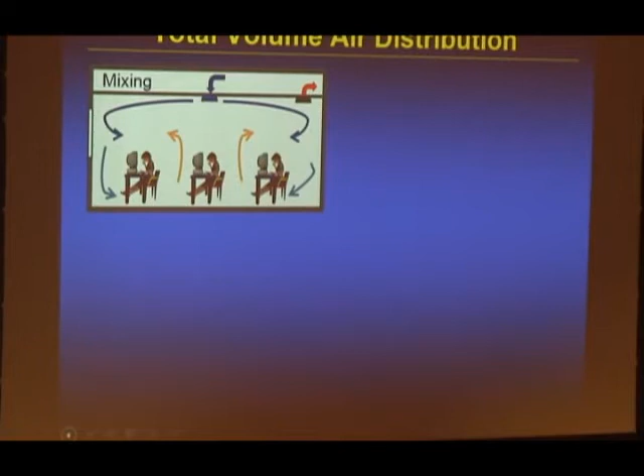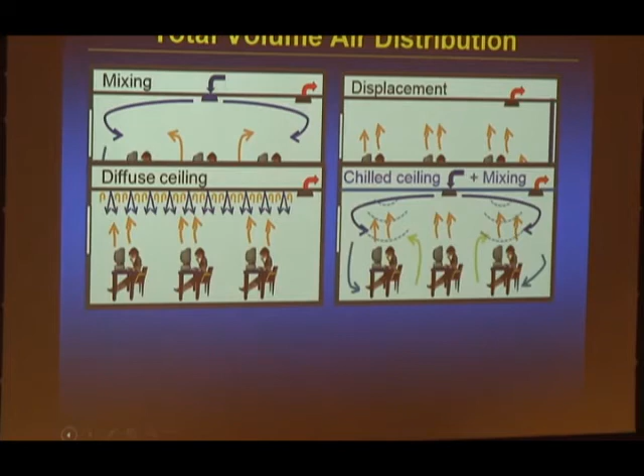How do we do it today in rooms? I believe all of you know about mixing ventilation, and displacement ventilation. We have diffuse ceiling ventilation, chilled ceiling combined with mixing ventilation, chilled beams, sometimes combined with radiant panels or without, underfloor ventilation, and several other ways to supply air into spaces.

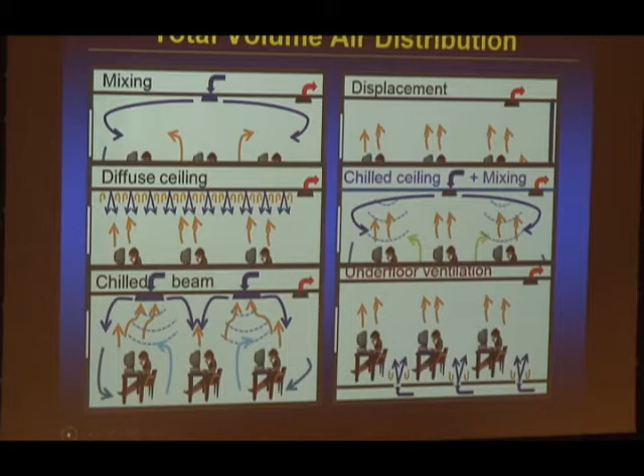Almost all of this, except to some extent displacement ventilation - though in practice very often it performs as mixing ventilation - are known as ventilation by dilution. It is more appropriate, I believe, to say air distribution by mixing. And this is quite an inefficient way to do it, in my opinion. I will try in the next slides to justify why it is so.

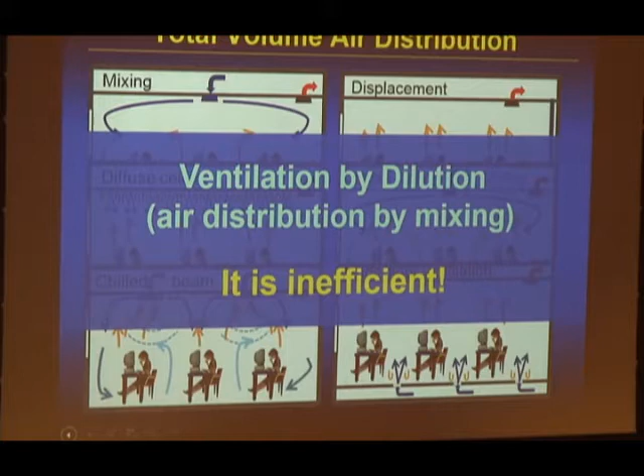Let us take the example of a room. It has a chilled ceiling combined with mixing ventilation that distributes the air over the ceiling and then over the walls, floor, and then it goes to the occupied zone and finally reaches the occupant.

Today it is well documented that building materials such as wall painting, flooring coverings, carpets or linoleum, or other materials, furniture, formaldehyde they emit, office equipment, occupants themselves - bioeffluents and exhaled air - all those emit pollution.

The purpose of ventilation, as I already mentioned, will be to dilute this pollution and to provide occupants with better inhaled air quality.

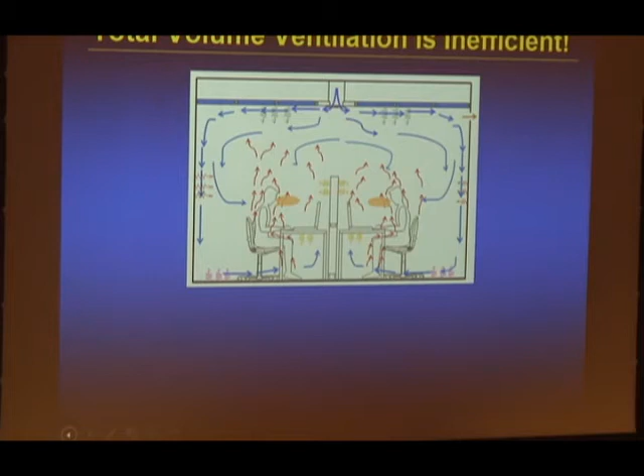What we do today is that we try to ventilate the entire space. And of course it is inefficient because at least part of this space, 1/3 of it, we never use. But in this 1/3, close to the ceiling, in fact, we provide the cleanest air.

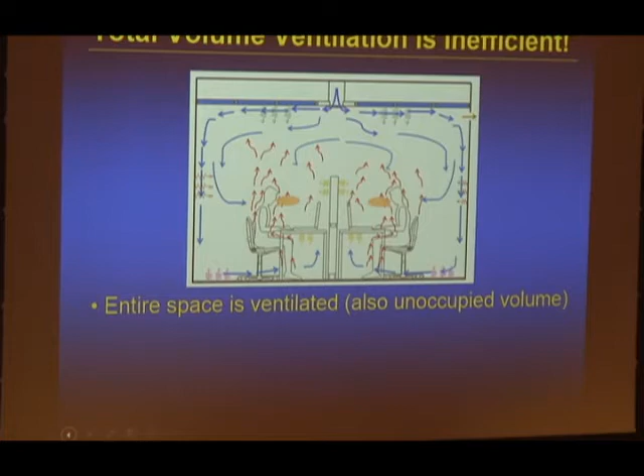We supply a lot of air into the space in order to improve air quality and reduce pollution. So we use a lot of energy, big air handling units, duct systems, and of course it's costly. What we do is quite inefficient.

All this pollution that I already mentioned, generated from the walls and the floor, we take it, transport it, and bring it into the occupied zone, close to the occupant. And then to improve the inhaled air quality, we supply more air and of course use more energy.

Even if we do so, it happens that people do not breathe clean air, simply because air supplied far away from them, from diffusers at the ceiling, by the time it reaches the breathing zone, is already mixed with the polluted room air. It is also warmed.

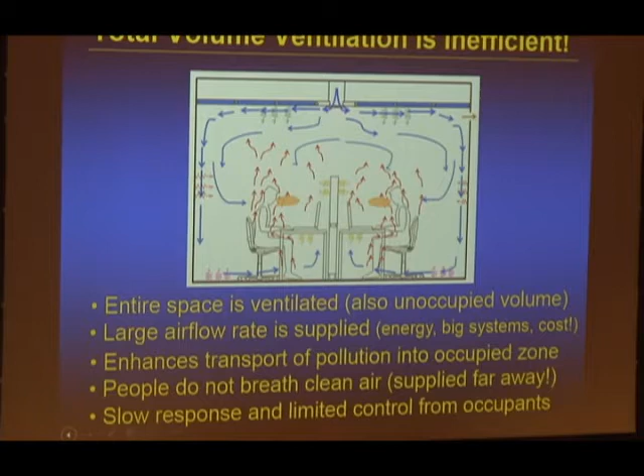Also, these systems, when we try to ventilate the entire space, they tend to be slow. They have limited control also - sometimes, in fact, no control from the side of occupants.

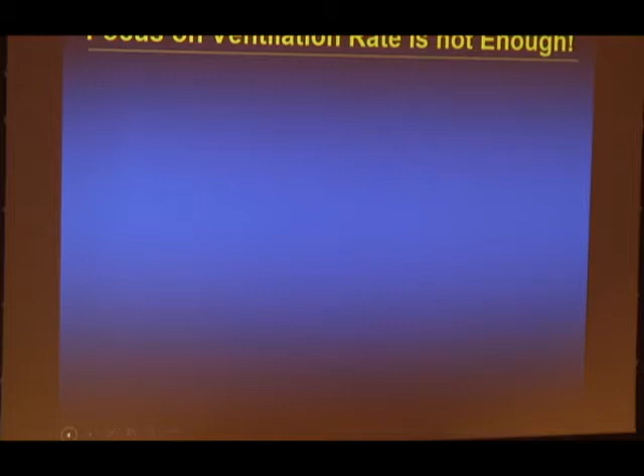What today, in fact, we focus mainly on - I listen to many presentations, and if you open the standards, we read very much about ventilation rate. Nothing, or very little, we read about airflow distribution, and it is very important.

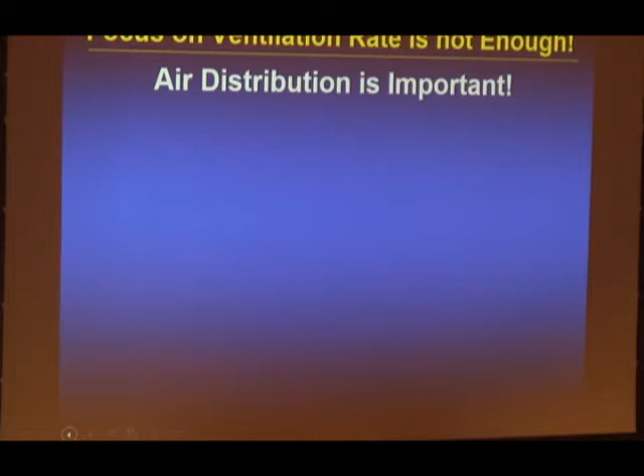It has in fact been admitted and realized that this is so important many years ago. I have here a figure from a book which was published in 1899 - so not last century, but the century before that. And it shows exactly why air distribution is important.

This is a classroom, and we have a teacher who generates or emits bioeffluents, polluted air, and because of the warm body's thermal plume, all this pollution goes to the ceiling. In the same way, candles - at that time there was no electricity, they used candles - generate pollution but also heat and buoyancy flows, and these flows move the pollution to the ceiling.

Then what we do is supply the clean air just where the pollution is, and transport it to bring it to the occupied zone, to the occupants. So, a very, very inefficient way. They advise us in this book not to do this, and give many other examples. Nevertheless, what we do today, in most cases, is the opposite of what they advised us.

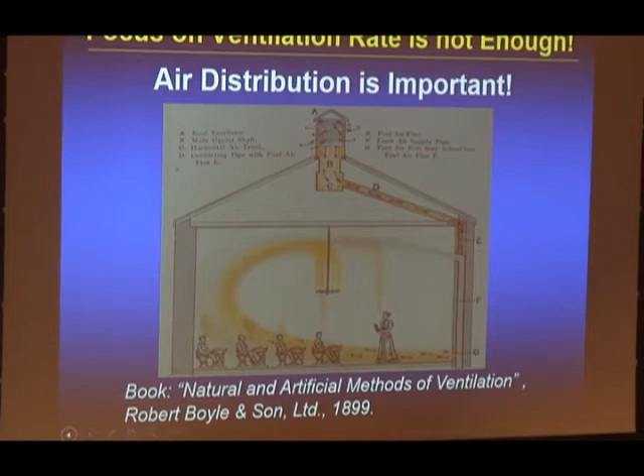Let us see the standards. Typically today, standards recommend certain flow rates for comfort, maybe 4, maybe 7, maybe even 10 liters per second per person.

The figure on the right shows percent of dissatisfied occupants with perceived air quality as a function of the ventilation rate, in liters per second per person. Results from Asia, Europe, and America show the same trend.

When we compare them: if we supply 10 liters per second, we may get about 15% dissatisfied occupants. But if we want fewer dissatisfied occupants, maybe only 5%, we have to improve the supply ventilation rate, maybe to 20 or 30 liters per second per person. That's a huge amount of air to supply into the space.

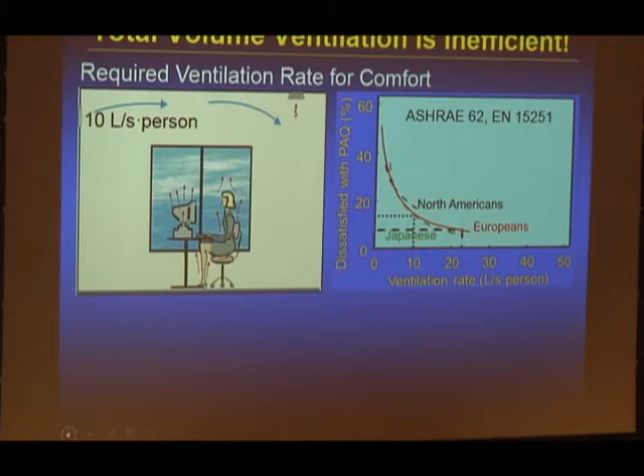A lot of energy we have to use. How about health? About 3 years ago, Sundell and co-authors published a review paper in the Indoor Air Journal on ventilation rates.

Their conclusion, based on a comprehensive review of available literature, was that we should supply a minimum of 25 liters per second per person in order to minimize health risks, sick building syndrome-based symptoms in spaces.

This is quite a lot compared to what we need on average for breathing, what we inhale, which is about 0.3 liters per second. Close to 100 times more we supply, and as I said already at the beginning, the primary aim of ventilation is to provide clean air for breathing.

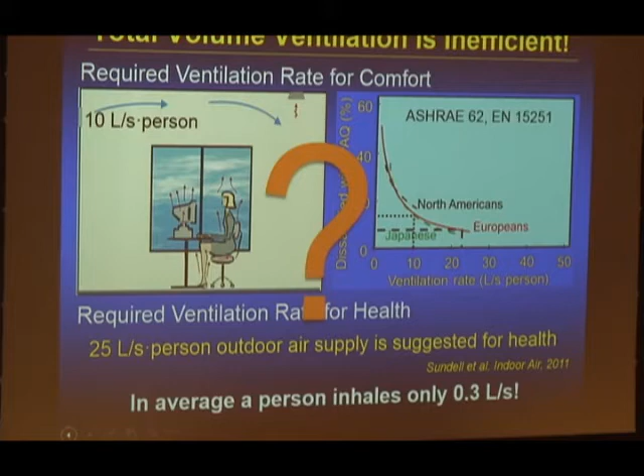So this is a question we have to try to solve. Often, ventilation air is also conditioned in order to maintain the right proper temperature and humidity in spaces.

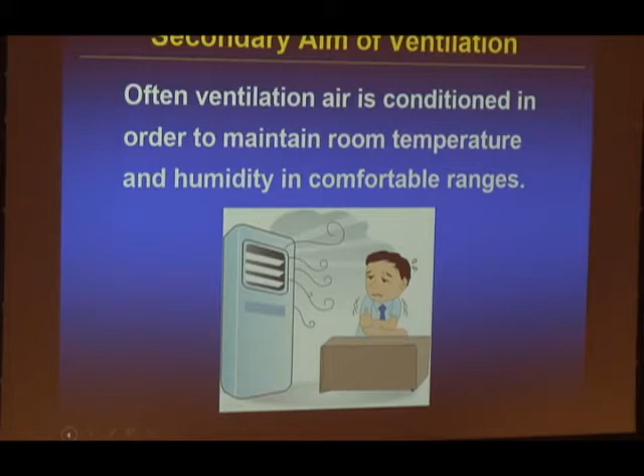Today it is well recognized that several characteristics of the airflow are important for thermal comfort of people, such as velocity, turbulence intensity, and frequency of velocity fluctuations. Airflow direction is important, air temperature is important, and so on. So it is very important that we are able to control this flow and its characteristics.

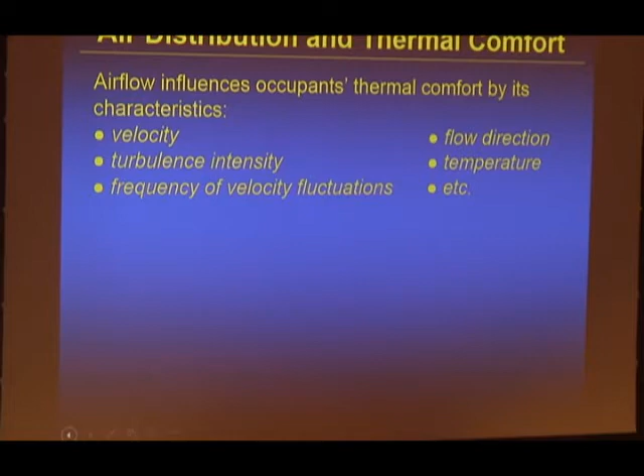Unfortunately, we are not able to do this, because with total volume air distribution, by the time the supplied jet or flow reaches the occupied zone, it is in the fully developed region of the flow. It is recirculation air, and that is very difficult to control.

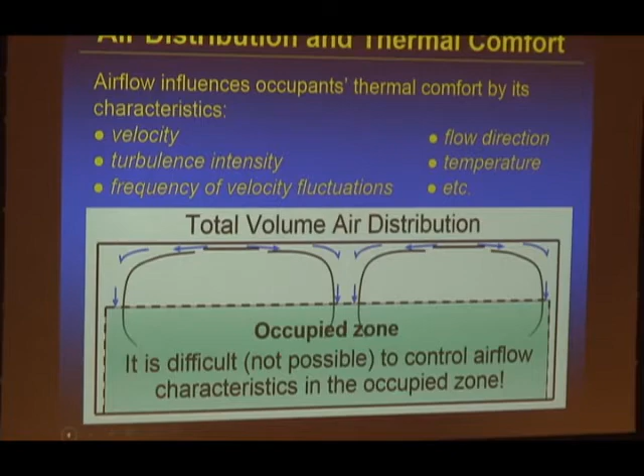Complex interaction of airflow in rooms exists. It is not the ventilation flow that always decides or defines the airflow pattern. There are thermal flows generated by heated objects, and the strength and location of these heated objects differ. This may change over time, and this may affect the air distribution in the space.

As a result, occupants will be exposed to a changeable environment. It is very difficult, in fact, to control this airflow interaction. Here the figure shows two examples.

We have an air distribution system on the left, well balanced to provide clean and cool air to the two occupants, and they will be happy. But as soon as solar radiation starts to hit the window, it becomes warmer and generates a thermal buoyancy flow, which together with the thermal flow from the computer and occupant becomes strong enough to discharge the ventilation flow to the opposite side of the room.

So the person near the wall, far from the window, gets a lot of air, maybe in discomfort due to draft, while the person near the window is also in discomfort because of warm discomfort. So this is very difficult, in fact, to control.

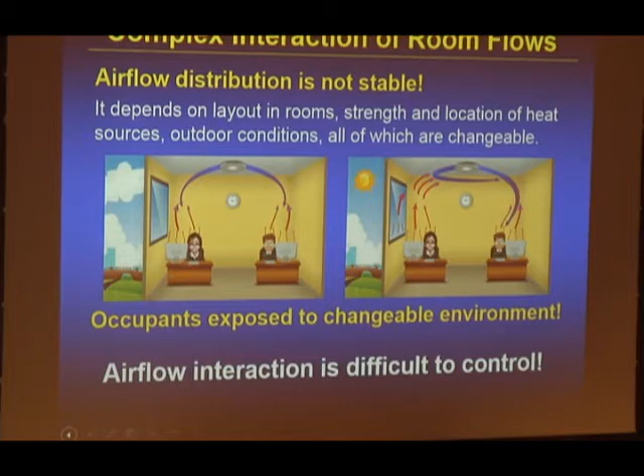Now, I believe most of us in this community believe that the goal is to have a healthy, comfortable, and productive environment in spaces, and not just one of these elements or components, but all of them should be in place.

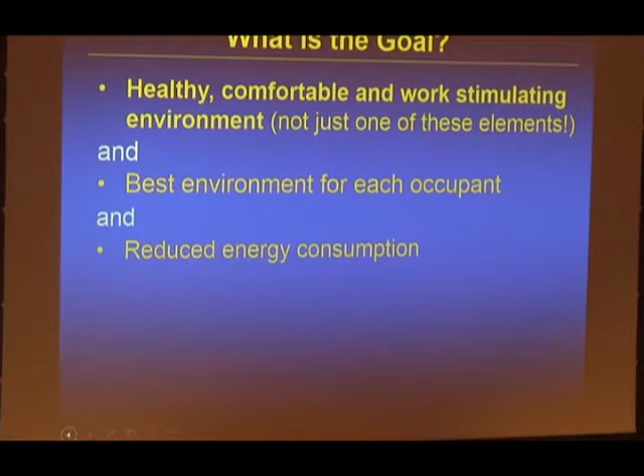It is also very important at the same time to have excellent conditions for each occupant, not for the average occupant, which does not exist. For each of these occupants, we may provide the best environment. And also, not instead, but at the same time, we have to reduce energy consumption. Some practitioners may also want flexibility in the use of space.

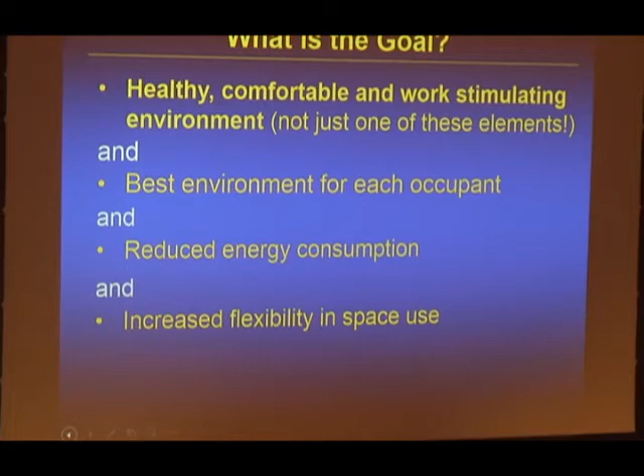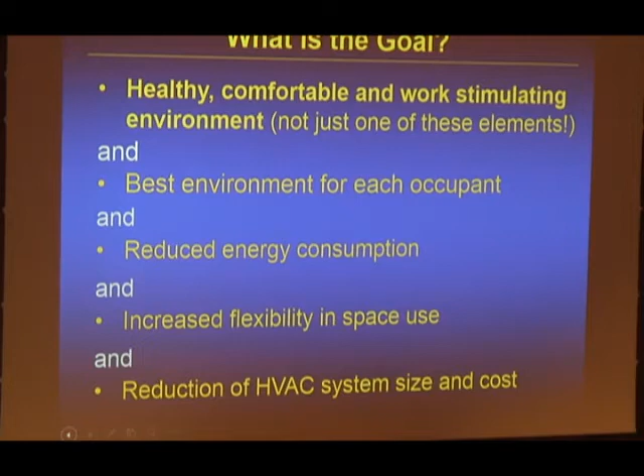This is very important also to sell the floor area of the building. And then we have to make the HVAC system smaller, to take less size from the building, and to be also cheaper and very easy to maintain. So we have several goals that we have to fulfill at the same time.

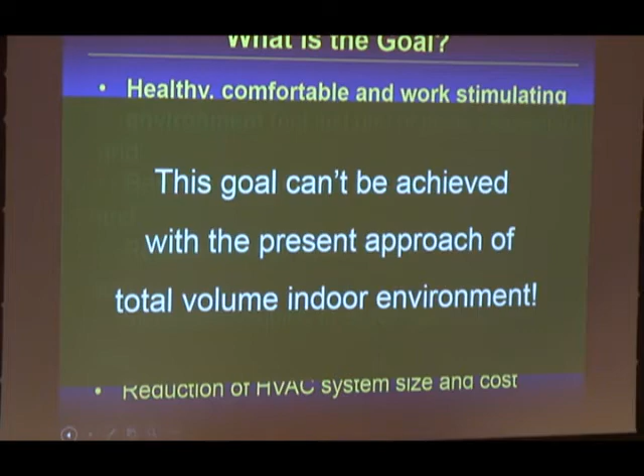What I already told you, it is clear that these goals cannot be achieved with total volume ventilation systems, total volume air distribution, or generally total volume indoor environment, which we aim to design today. So what we have to do is go ahead and find a new solution. We have to change. Some paradigm shift we should think about.

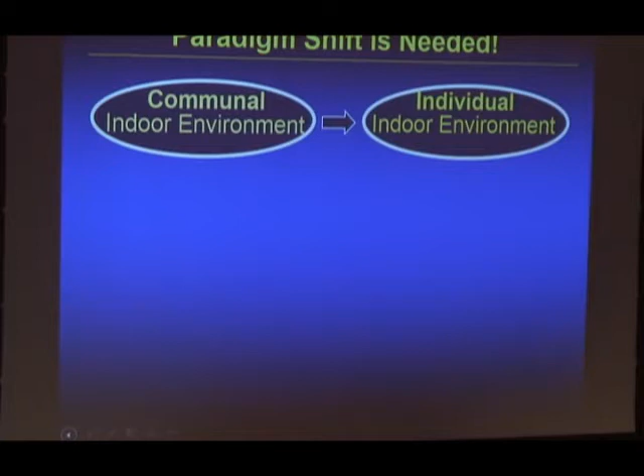So what I suggest is that we go from communal indoor environment to individual indoor environment, from total air distribution to advanced air distribution. And we go from supplying clean air to nobody, to supplying clean air to everybody in the room. And the question is, will we be able to do this?

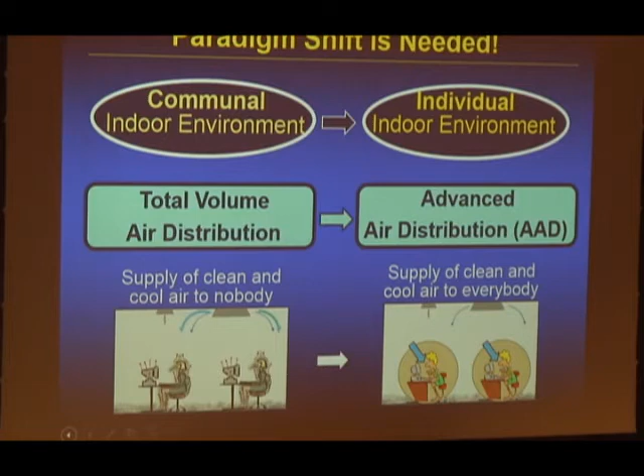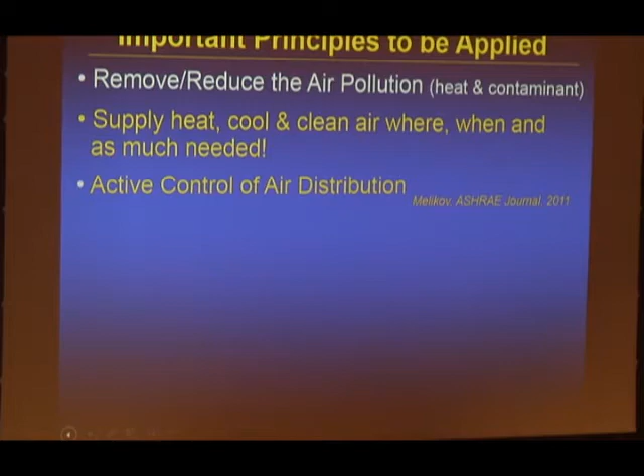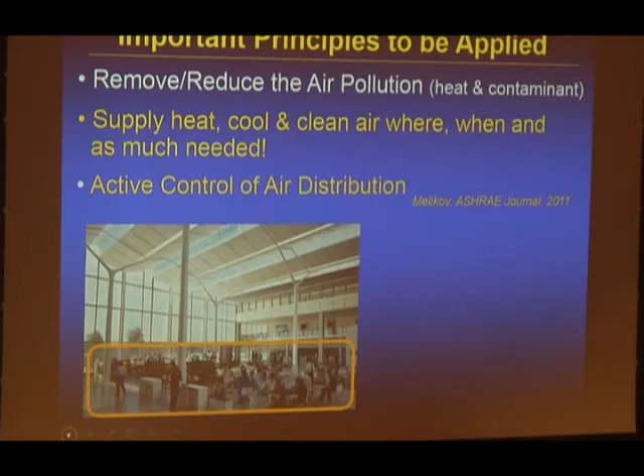Already some years ago, personalized ventilation was introduced into practice, where part or all of the clean air is supplied from diffusers placed close to the breathing zone of the occupant, and the occupant has the possibility to control the amount of air supplied and also the direction of the flow, as the occupant prefers.

So it is documented that this type of air distribution improves inhaled air quality and thermal comfort. It decreases the SBS symptoms, and it improves performance.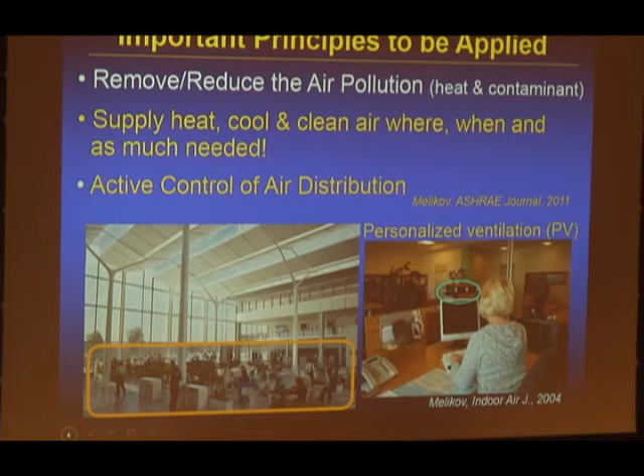So I will show you some results from recent experiments we did, which demonstrated the importance of considering both health and comfort of the occupants.

We tried to validate what is recommended today in standards as an energy-saving strategy: keep the room temperature 2-3 degrees higher than the comfortable temperature range, and then provide occupants with thermal comfort by elevated air movement with elevated velocity.

So in a climate chamber at 28 degrees and relative humidity of 50%, we exposed people to 3 conditions. One was personalized ventilation, shown in the middle, which supplied clean air with the temperature and relative humidity the same as the air in the chamber.

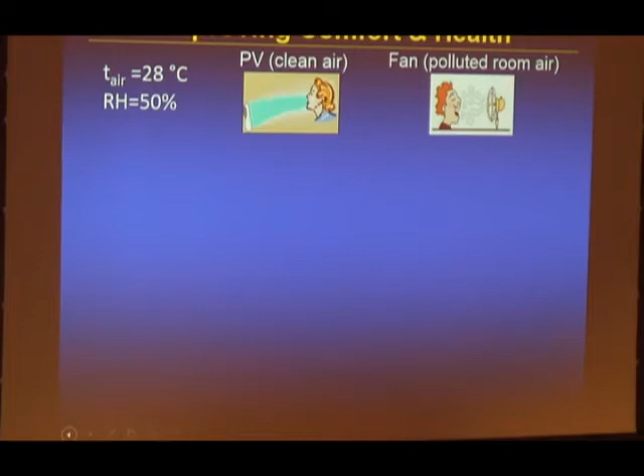The second cooling method we used was a cooling fan. It moved the air, but it moved the room air, the polluted air in the room. Then we studied the response of the subjects to these 3 conditions, also without any cooling.

And here are the results of this study. On the left side is the percentage of dissatisfied subjects when they used either personalized ventilation, then a fan, and no cooling at all. In blue is perceived air quality, in red is thermal sensation.

Both personalized ventilation and the fan reduced dramatically the percentage of dissatisfied people. However, if we look on the right side of the figure, which shows SBS symptoms—here I've shown only difficulty to think and headache—we see how much it increased, how many persons reported an increase of these symptoms after 4 hours of exposure.

In case of personalized ventilation that supplied clean air, it was somewhere around 8-10%. It was much higher, almost twice, in case of the cooling fan and no cooling. In fact, the cooling fan and no cooling performed very much the same.

The conclusion is that we should not aim only at one of these elements of indoor environment which I already discussed—comfort—but we should also care about and take care of the health of the occupants when we apply solutions in practice.

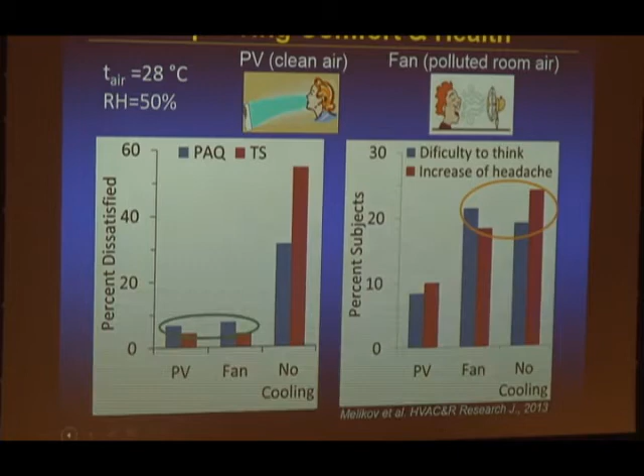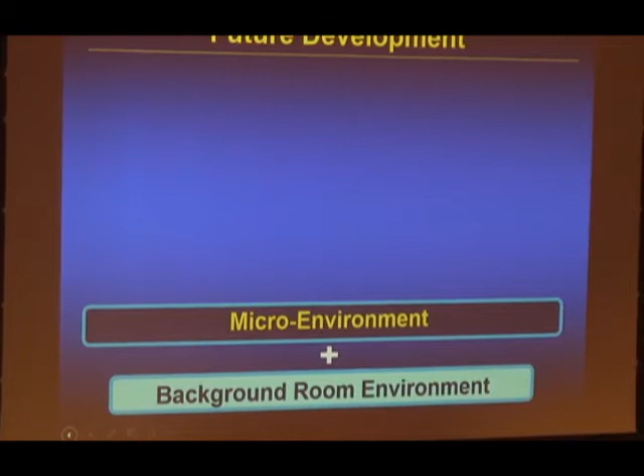So, future development, as I see it: I believe we should add microenvironment systems to the background room environment. These systems might be different—they can be personalized, or they can be personal. There is a difference between these two systems.

Personalized systems are attached to the building or to furniture. They may be used or calibrated for different people because they may sense a new user who comes to that workstation. Personal systems are those that belong to us, that are our own, and we can use them—they may even move with us.

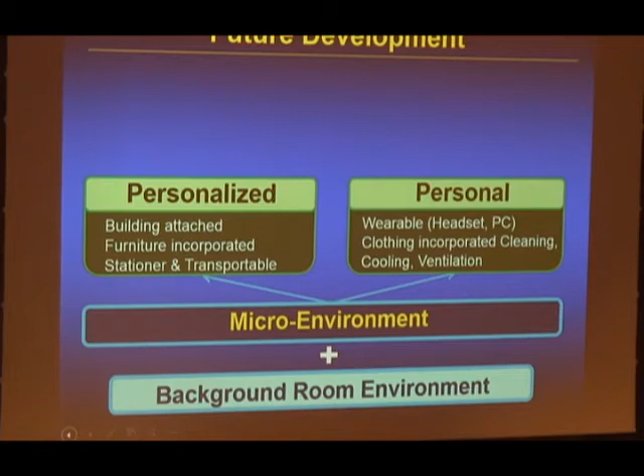I will show you some examples of this. Both systems may be user-controlled, calibrated in advance, and when we start to use the system, they may sense us and adjust the set points as we have used them before. But also they may be intelligent, sensing, predicting, and providing the best environment based on the physiological response of the body.

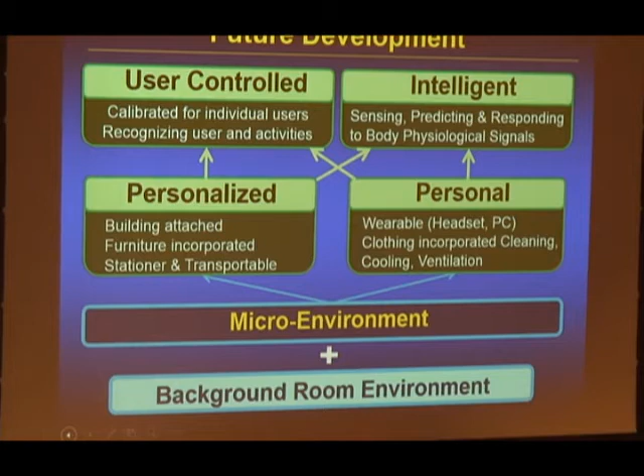So it may sound like science fiction, but it isn't, because the other day we listened about inverse CFD predictions, which is very much the same. I will now show you examples of how we can easily implement advanced air distribution and benefit in practice.

This is a very commonly used system, at least in Europe, where we have a chilled ceiling combined with mixing ventilation that generates a more or less uniform environment in the occupied zone. This environment is also very difficult to control and has a very slow response.

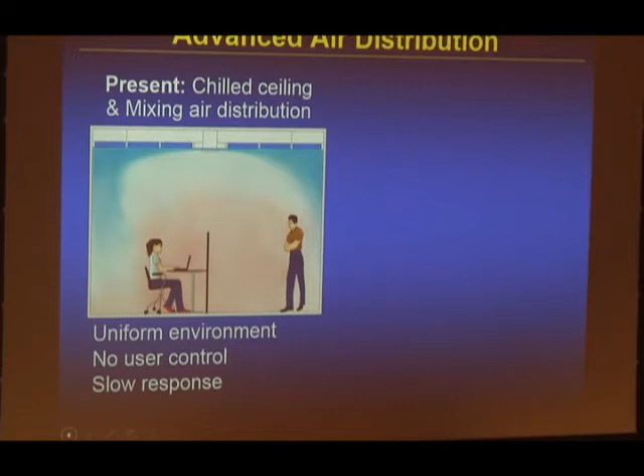Instead, we may combine the chilled ceiling, still the same as in the first example, but introduce personalized ventilation. It's very easy to incorporate the ducting in the floor. Today we incorporate floor heating, and it will be just as easy to incorporate ducts that supply personalized air to each workstation, using a plug and operate method.

This gives quite a lot of flexibility to move the workstations, and it's under individual control of the occupant. If the occupant doesn't use the system or moves away, it still provides a minimum amount of air, as required by the standards, supplied in this case by the partition, which still generates a fairly uniform background environment.

So in this way we can generate a preferred environment. We can provide users with control and very quick response. This means that when we go from outside, which is warm and humid, to our workstation, we immediately turn on the system and it provides cooling.

We may even later show how we can control this personalized flow, cooling more at the beginning and less afterward. These results are reported in this conference in two papers.

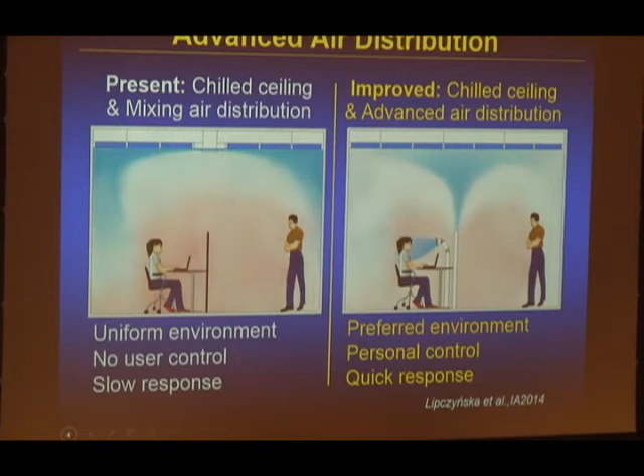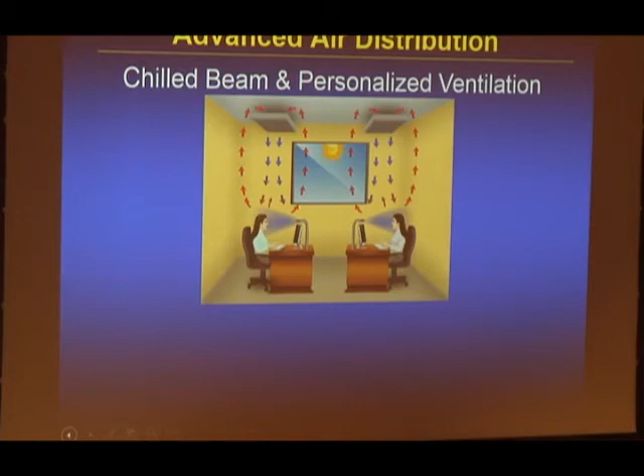Here is another one, on energy saving, which is important, and all of us strive to achieve it. In this case, we combined a passive chilled beam to remove heat with personalized ventilation. The advantages are the same as I already told you. But if we keep the room temperature slightly higher, maybe 27 or 28 degrees, occupants will still get very good thermal comfort, the same as if the temperature were in the comfortable range.

We have calculated that we may achieve up to 80% savings of ventilating air, not energy saving itself, but of the air volume. Of course, this will still mean substantial energy savings.

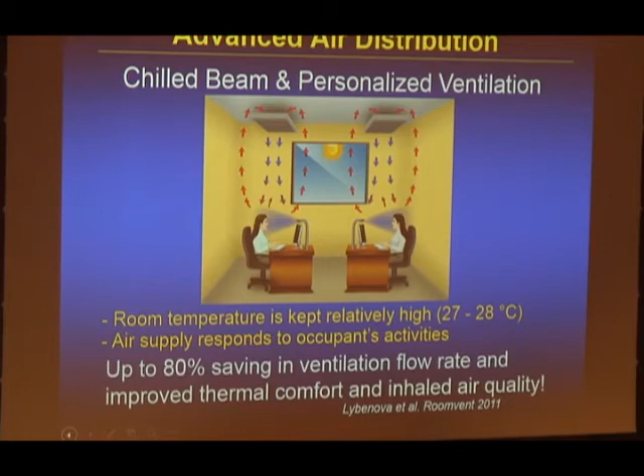To control the airflow, as I mentioned at the beginning, it's very important that we are able to control the flow. With advanced air distribution, we may design air supply devices that control not only the velocity of the supply flow, but also how it spreads and its direction.

So it's very efficient: when we first come from a warm environment outside to our workstation, we use a very focused jet of air, shown in orange. Then, after some time, it may be spread out in order to cool over the body and get more benefit. This can be done either manually or automatically.

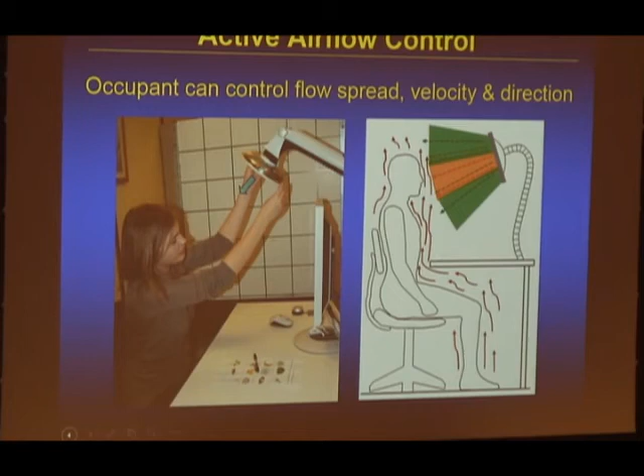Free convection flow around the human body is one of the important flows for the interaction of flow in rooms, and for the quality of air we breathe, but also for our thermal comfort. So we should learn how to control it.

So how can we improve this? We may simply apply a passive control strategy: a movable board that can gently be moved and attached to the lower chest.

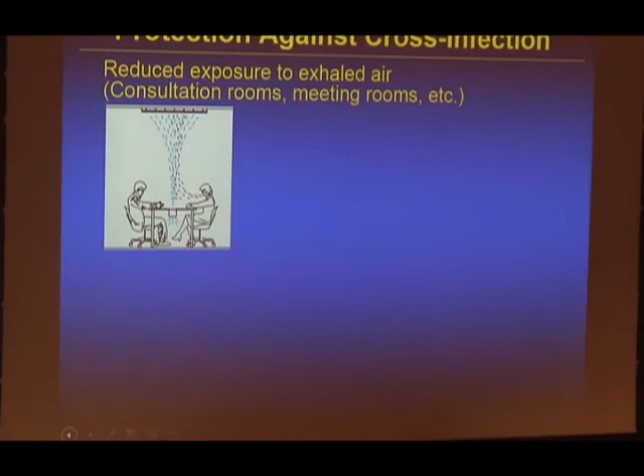Here is another case when we may use the flow curtain, as shown here, to entrain the exhaled air that is polluted, that might be infected, and move it upward. And we may control this flow.

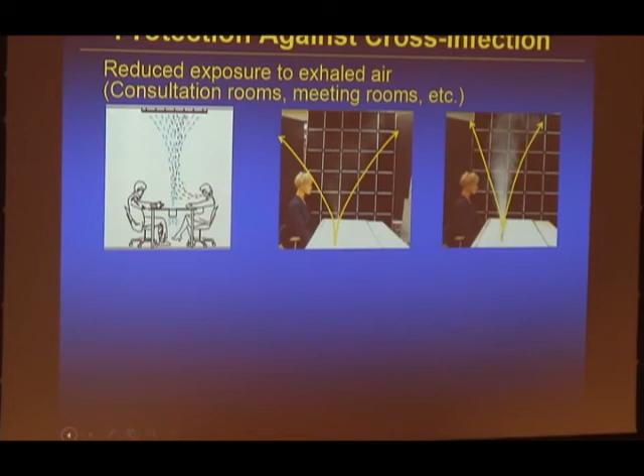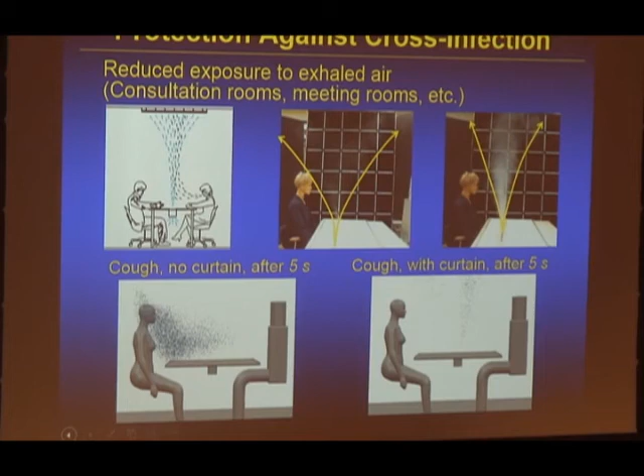We have done CFD simulations of a coughing occupant. This one is coughing, this one is exposed. Without the curtain, after 5 seconds we get a cloud of droplets, and some of those will be inhaled. When we have the curtain, very little of the droplets reach the breathing zone of the exposed occupant.

In hospitals, it is important to ventilate. Today, hospitals are ventilated with high exchange rates, but using mixing ventilation. Some time ago, we developed bed ventilation, with two devices attached on the two sides of the bed.

The first device takes the room air, cleans it, disinfects it, and supplies it gently over the patient, guiding the exhaled air, which is polluted and might be infected, toward the other device, where it is cleaned and supplied upward as a curtain in front of the doctor. So it protects the patient, the doctor from the patient's air, but also it protects the patient from the air exhaled by the doctor, because it might also be infected.

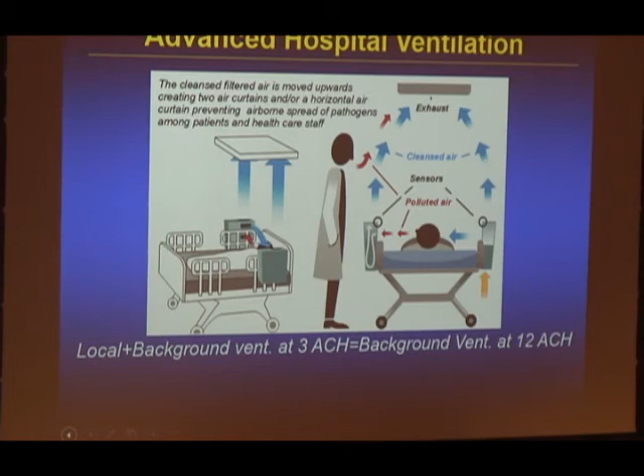It's polluted. We have performed many experiments, and we report that local ventilation combined with background ventilation at 3 exchanges per hour provides the same environment as background ventilation only at 12 exchanges. We have quite many benefits in this way: increased flexibility in space, small air handling units, plug and operate principle can be applied. We can move the bed in the corridors, in another room, no problem.

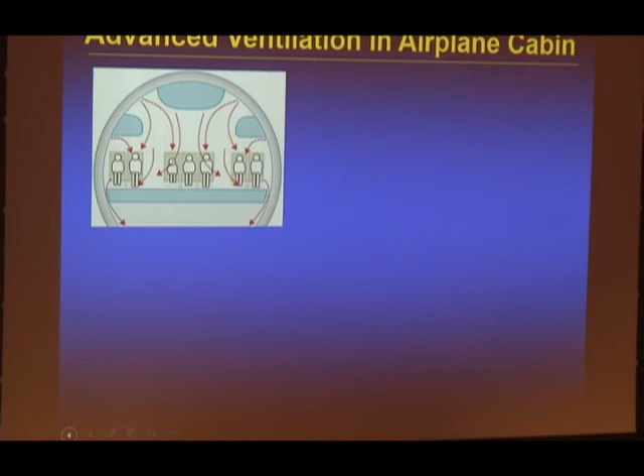This is another example of advanced air distribution. We have a cabin which is a densely populated, crowded space, and the risk of cross-infection is huge. How do we ventilate today? This is mixing ventilation. Now we may do it in another way, maybe a smarter way.

We supply the air from the back of the front seat so it goes to the breathing zone of the occupant and improves inhaled air quality. But this air also discharges the exhaled air from the occupant, the passenger, backward to two air exhaust devices.

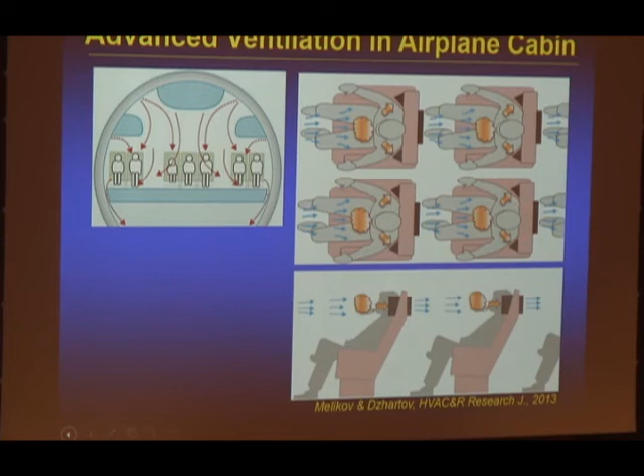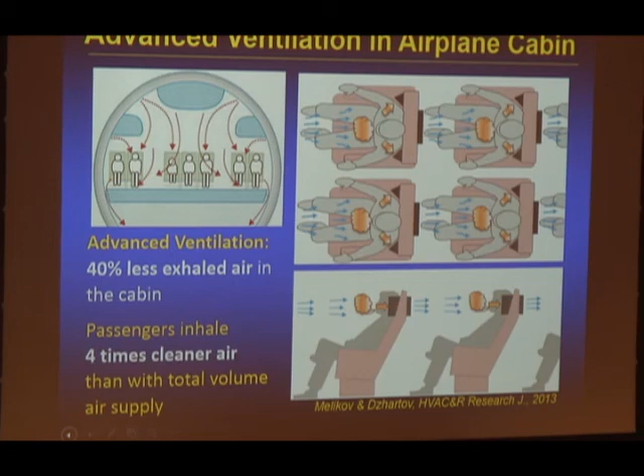In this way we may achieve good results. We have performed full-scale measurements in a section of a cabin, using a cabin mock-up, and we document a 40% decrease in the background concentration of exhaled air, and also 4 times cleaner air inhaled.

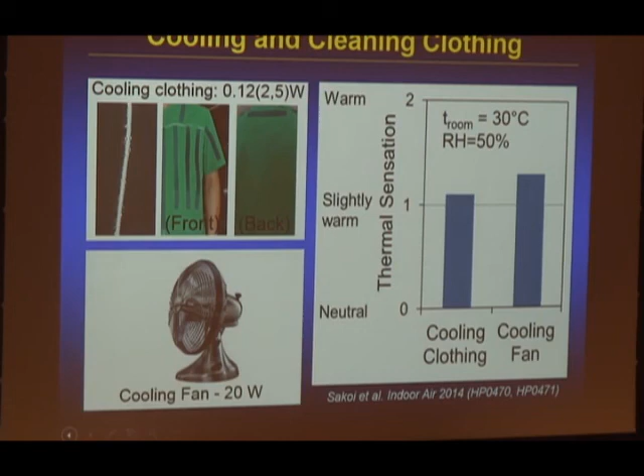These are the CFD simulations, depending on how the air is distributed. When we supply it from the front or from the side, it goes directly or very close to the mouth and nose. And we document in full-scale experiments also 90% clean air inhalation. This can be used in hospitals, as shown here, call centers, and many other applications.

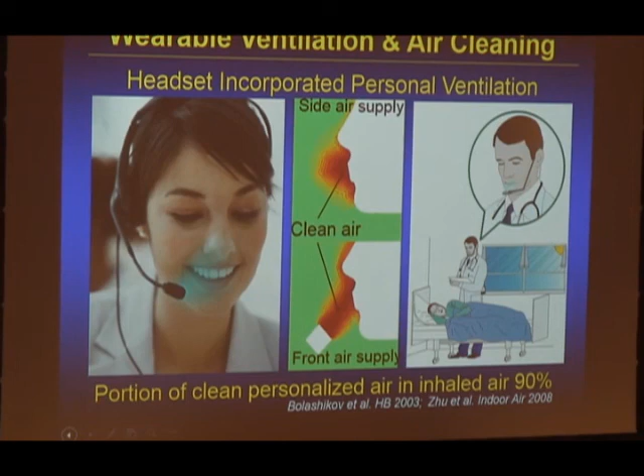So there is a lot to be achieved. I saw during this conference many young people attending, so you have a lot of work in front of you — simply you have to be ambitious to achieve it. This will also require a lot of cooperation between many different disciplines, and they are all present at this conference. Amazingly, how many different disciplines are present here. So it's a huge potential for big success. Thank you very much.